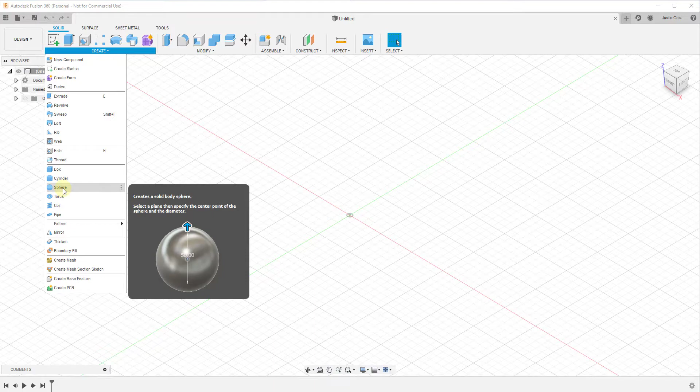The way we're going to start off is we're just going to create a sphere using the Create tools inside the Solid tab. Just go under Create, there's an option for a sphere. We're going to click on Sphere, and then we're going to pick an axis.

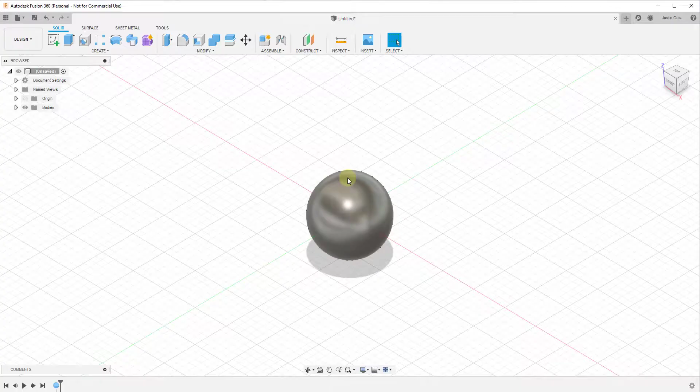It doesn't really matter which one, or a plane. In this case I'm going to click on this one, and then I'm just going to click a center point, and it's going to bring a sphere in. I'm going to make this a 50mm circle, and click OK. That's going to create that as a new body centered on our origin.

So we've got our sphere, which for a simple Christmas ornament is perfect. Now what we want to do is add the little top piece that goes on top of here that you hang the Christmas ornament off the tree on. In order to do that, we're going to create a sketch.

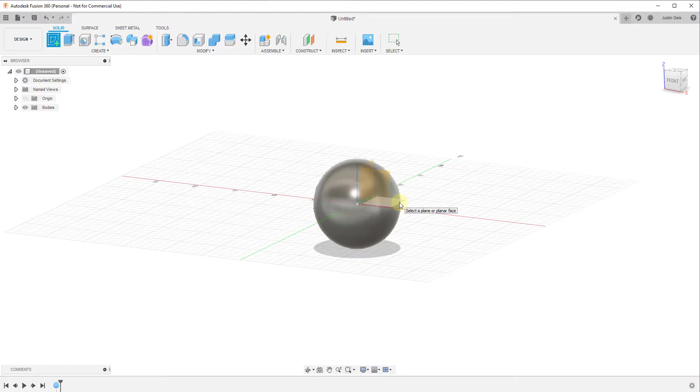To create a sketch, I'm going to click on the button for Create Sketch, and then we're just going to select the straight up and down axis, the flat one right here. Then we're going to use the circle tool to draw the radius of our top piece. In this case, we're going to say it's 20mm, and I'll click Finish Sketch.

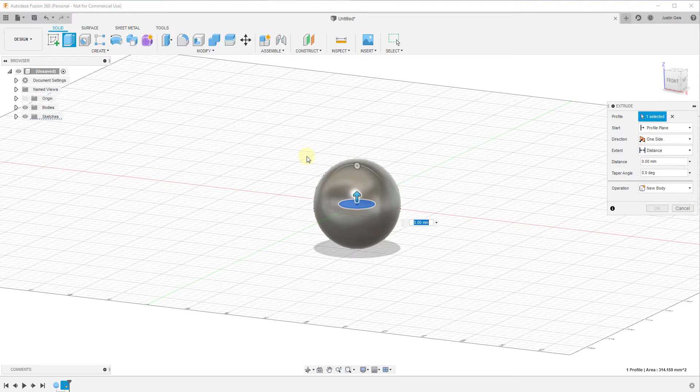Now I want to use the Extrude tool to extrude this up above my object, so I'm just going to extrude it up through here. Right now this is extruding with a cut operation. We're actually going to use a join operation. A join operation will add this new geometry to our original shape.

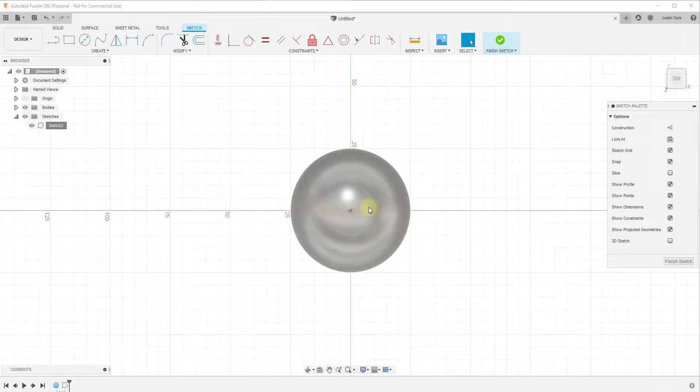But before we do that, let's go in and edit our sketch. I'm just going to right click on my sketch, edit my sketch, and we'll use the dimension tool to set the diameter of this shape. We're going to set our dimension to 15, which makes this a little bit smaller, and click Finish Sketch.

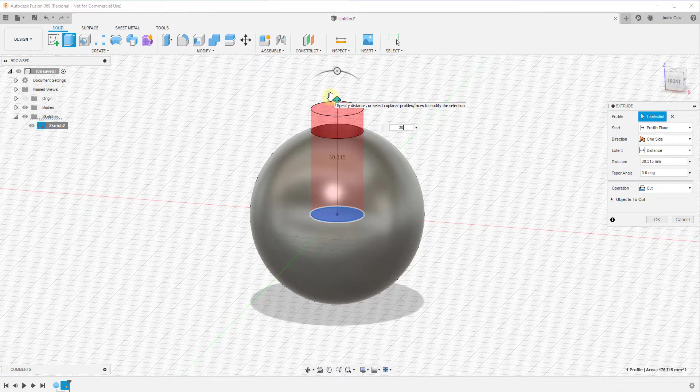Then just go in and select the option for Extrude and extrude this up through the top of your ornament. I'm going to set this length to 30 by typing in 30. Make sure with your operation you click on the button for Join, so that it only adds this new geometry outside of your original geometry, and click OK.

So now what we have is a single body with these two objects on top of it. We've kind of roughed out our shape. But one thing I don't like is the transition around this edge isn't very smooth, so we're going to use the fillet function to add a rounded transition at this line.

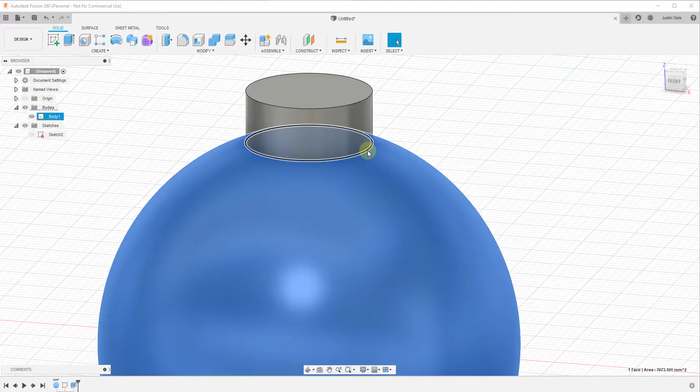All you need to do is click on the button for fillet, click on this one line, and you can click and drag this out. This will create a rounded edge so you have more of a transition between your two objects, rounding off this edge to make it look more natural.

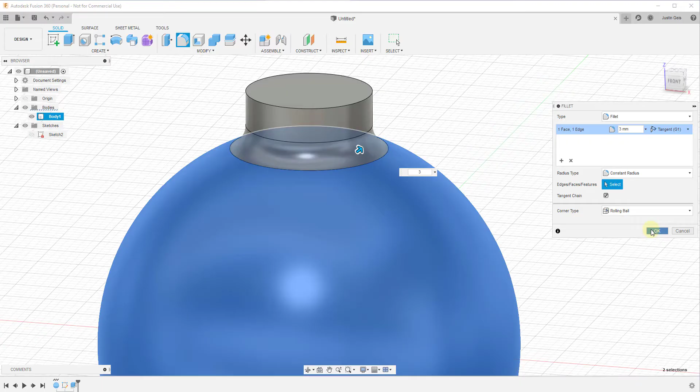I'm going to type in a value of 3 and click OK. Now we've got this rounded transition in here. If anything, that might even be a little bit much, so maybe we'll run this again, set it to something like 2, and click OK. Now we've got this nice transition in here.

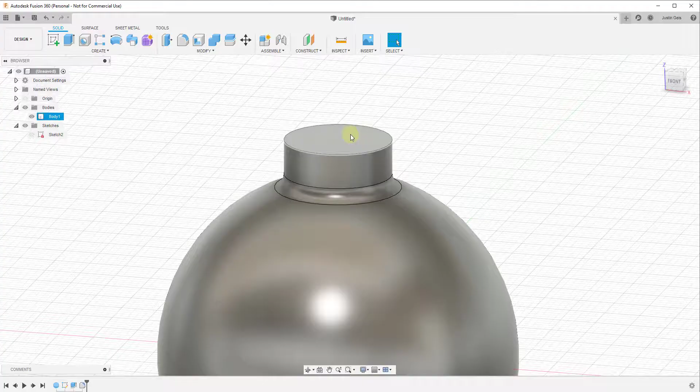Now what we need to do is model out the little cap that goes on top of this. To do that, I'm just going to add a new sketch, then click on this top plane, and we're going to draw a circle in here. If you remember, this original shape was 15mm, but we have to assume that this cap is going to be a little wider than this.

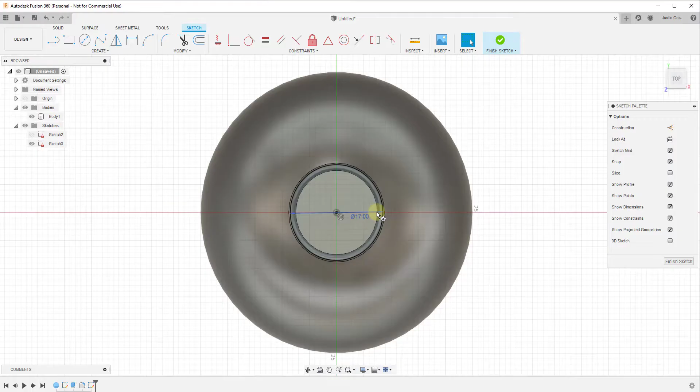So in order to make the cap a little bit wider, I think I'm going to go ahead and set this to 17mm and click Finish Sketch. Let's see how far outside of this goes. I think that works pretty well.

So what we want to do is extrude this up. I'm going to take this and make sure to get the central piece and the top piece, and extrude these up 1mm. Note that this defaults to the join operation, but you don't want that because you want this to be a separate body since we need to edit this one separately.

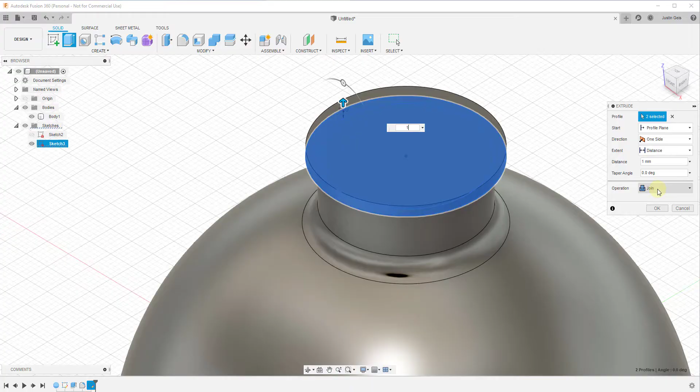So I'm just going to go down, click on the button for New Body, and click OK. Now we've got our piece down below, which is going to make up our ornament, and then our cap up above, which is a second body. So what I want to do is turn off Body 1.

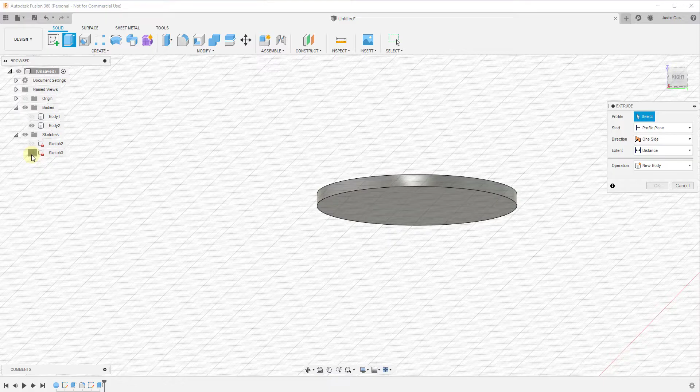We're just going to do another extrusion. I'm going to come in here and extrude, making sure this sketch is turned on. I want to go ahead and click on this, and set this to join because I want this to join with my top part. We're just going to extrude this down by negative 4.5 millimeters. We're going to hit OK.

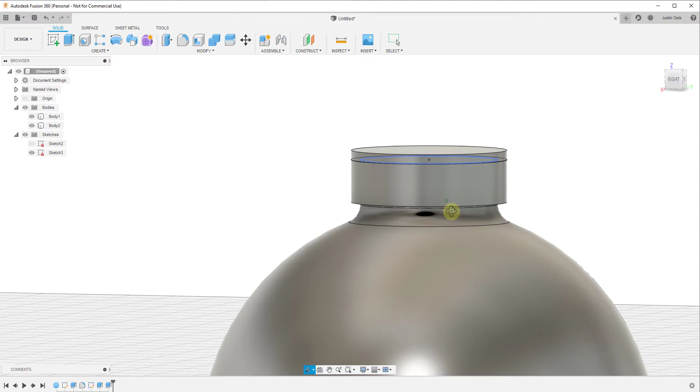So now we've got two bodies in here, right? We've got our first body, which is our ornament, and our second body, which is our cap. So what we want to do now is add the detailing around the cap where this is kind of cut out a little bit. The way we're going to do that is we're going to add another sketch.

So we're going to click on Create Sketch and set this so this is going to be straight up and down just like this. Then we just want to come in here, and because this is centered on the origin, we want to draw this around this green line because we're going to create a circular pattern where we repeat the cut over and over again. So I'm going to keep this simple.

I'm just going to draw this out maybe a 0.5 millimeter. We'll draw this up maybe 3 millimeters. And then we just want to draw this as a 135 degree edge. So we're going to type in 135.

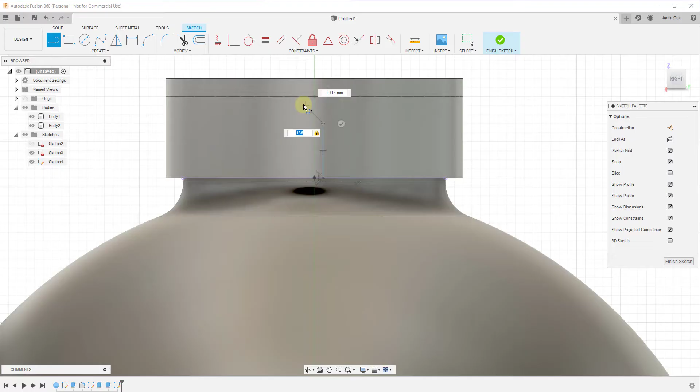Then we're just going to move our mouse. You can go ahead and move this so that it's centered on this point right here. And then I'm going to draw one more edge across the middle and one more edge on the bottom. What we're going to do is use the mirror tool.

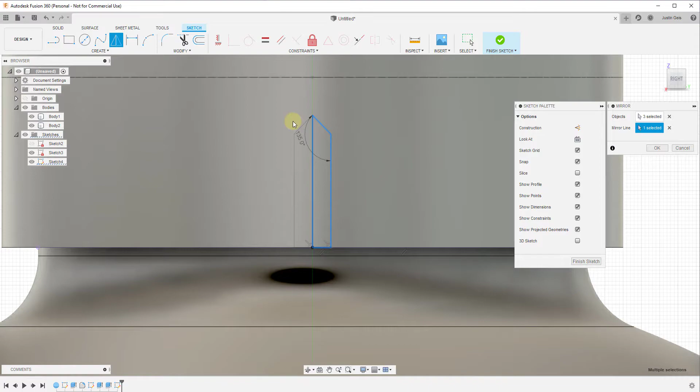So just go up to mirror, and you want to select these three edges as the objects you want to mirror, and then this as your mirror line. That's going to mirror these across this line that we selected, and we can go ahead and click OK.

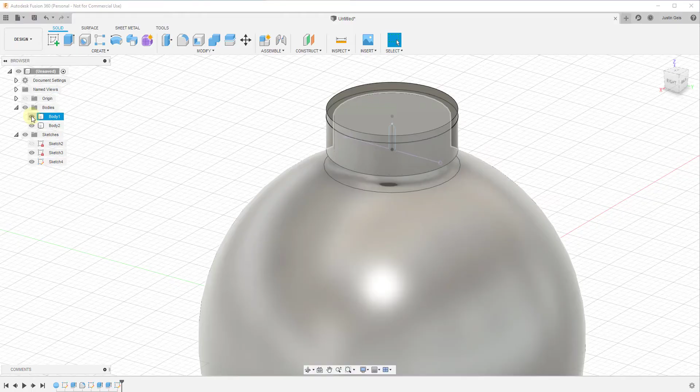Now what we have is a shape in the middle that we can extrude out in order to use to remove material. So we're going to click on Finish Sketch, and turn off the body associated with our Christmas ornament and only leave the cap. So we're going to turn off body 1 and leave body 2 turned on.

And we're just going to use the extrude tool, and select these two faces, and drag this out. You can see how this defaults to cut mode because it's intersecting with another object. But the problem is we're only doing this on one side. What we want to do is set our direction to symmetric.

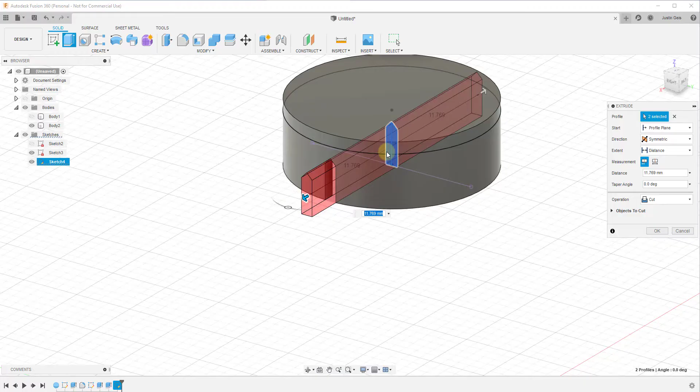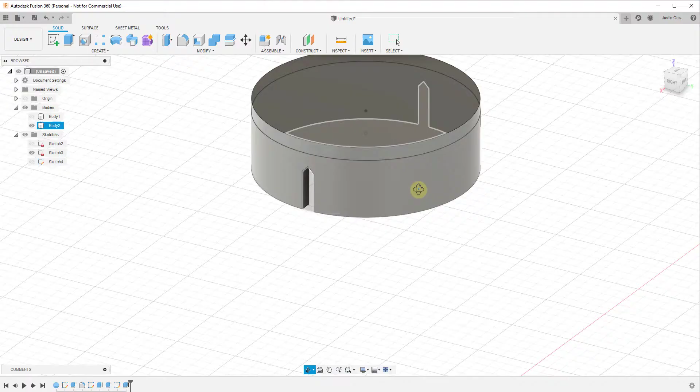If you set your direction to symmetric, then when you click and drag this, it's going to click and drag out on both sides, meaning then we're going to be cutting both sides of this object. We're going to go ahead and click OK. So now, if I look at this, you can see I have cutouts on each side here, and you can make this profile whatever you want when you draw that in, but in this case I wanted to keep it fairly simple.

And so now all we need to do is repeat these cuts all the way around this cap. In order to do that, we're going to go to Create, Pattern, and do a circular pattern. That allows you to copy things around a circle or around a radius. In this situation, what we want to copy is this feature, or this cut.

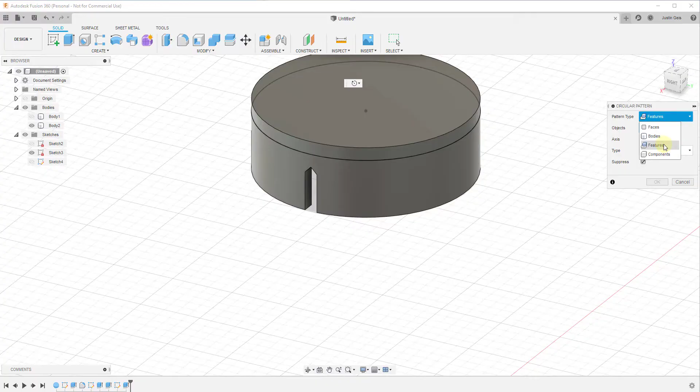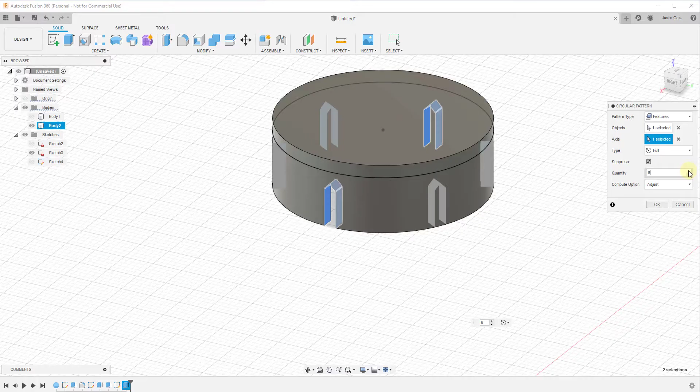So we're going to use the drop down and select Features, and we're going to click on this. Note that both of these cuts get selected when we do this. And so then all we need to do is select the axis that we want to rotate this around. I'm going to click Select and find this blue axis. You can see this is giving me a preview of what this would look like if we had multiple different cuts in here.

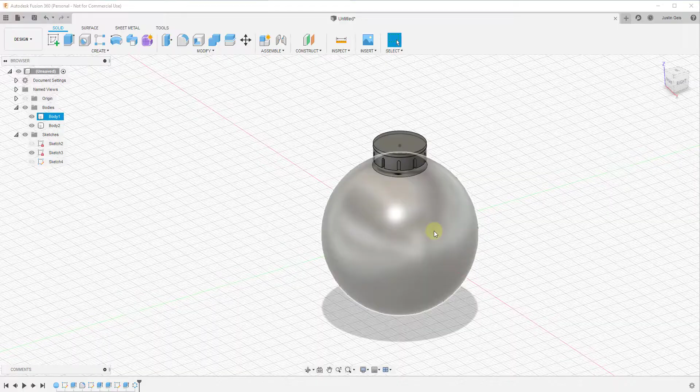I'm going to go ahead and set this to 10 for right now and see how that looks, then click OK. You can see how that repeats that cut 10 times around this central axis. So now if we turn body 1 back on, you can see how we've got our cap around the top here, and then we've got our body making up our Christmas ornament.

And then the one other thing we might want to do is come in here and create a torus across the top to act as our hook that this would hang off of. So we can just go to Create and click on Torus, and I'm just going to click on this top face for right now. We're going to have to rotate it probably, but that's alright.

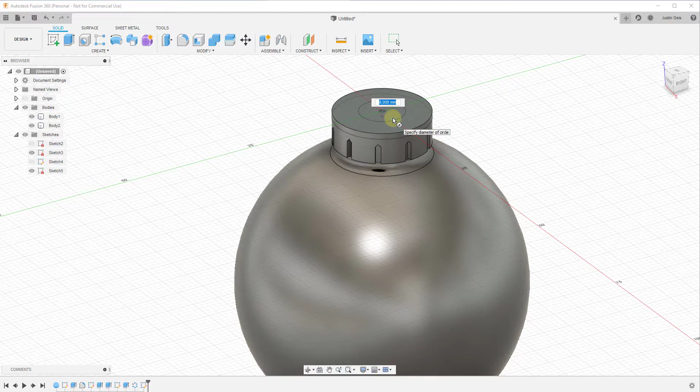So we're just going to set a torus with a very small diameter. Remember that you can set the diameter of the torus by clicking and dragging this arrow or by typing a value in, and you can also set the inside diameter by clicking and dragging this. We're going to go ahead and make this a new body, and click OK.

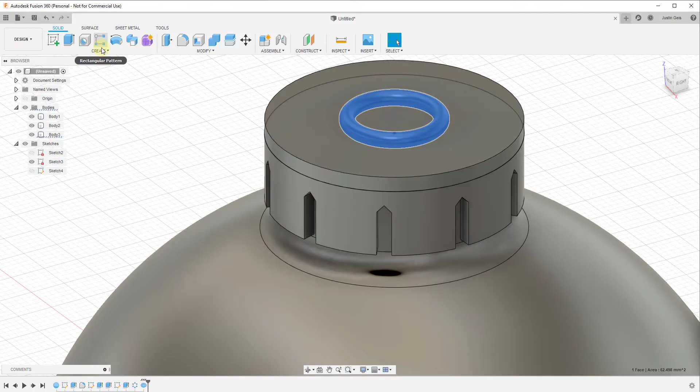And then I'm just going to take this - there's probably an easier way to do this too, but I'm just going to rotate it up by 90 degrees, and rotate it sideways 90 degrees as well, and click OK. So this is fine - we could probably leave it as is if we wanted to, but we do have a torus kind of intersecting with this face right now and continuing down into our object.

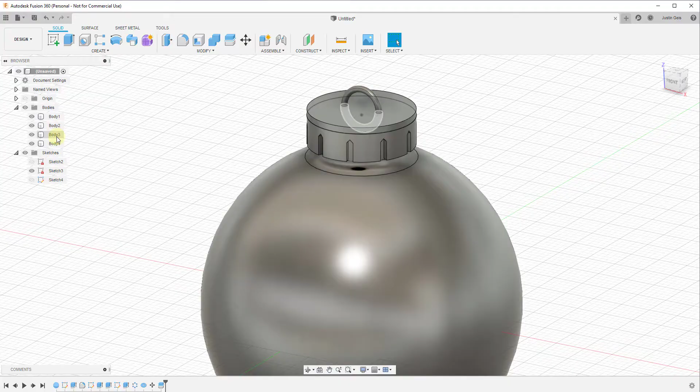Well, what I want to do is just split that, so I'm going to use the option for split body here, and tell it to split the torus, using this edge as the splitting tool. If we click OK, you can see how this splits this object into two different halves - you've got the top half and the bottom half. We can just turn that bottom half off.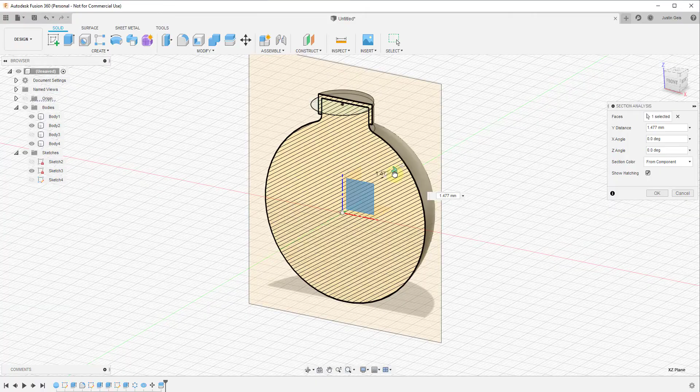And so now when we've done that, this is all a solid. If you were to go in here and inspect this and do a section analysis along this face, you can see how this whole thing is operating as a solid. We had that extra little piece removed and all of that, so if you wanted to 3D print this or something like that, you should be able to do that.

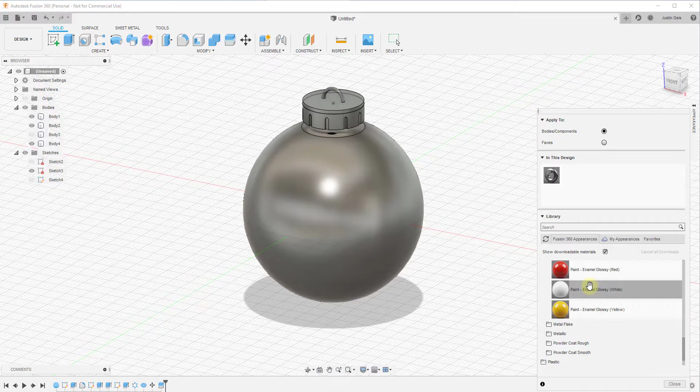And then I want to go ahead and apply a material to this. The way I want to do that is I'm just going to tap the A key, and that's going to open up the appearance library, and you can come in here and add different coatings or looks to this. So in this situation, I'm going to go down to glossy paint, and drag glossy paint onto this object.

So now I'm going to turn that body off for a second. I'm going to tap the A key again, and drag a polished bronze onto this object. We'll just click the keep button in order to keep the red material that was applied to the rest of this. And so now I've got a shiny Christmas ornament with a cap on top of it.